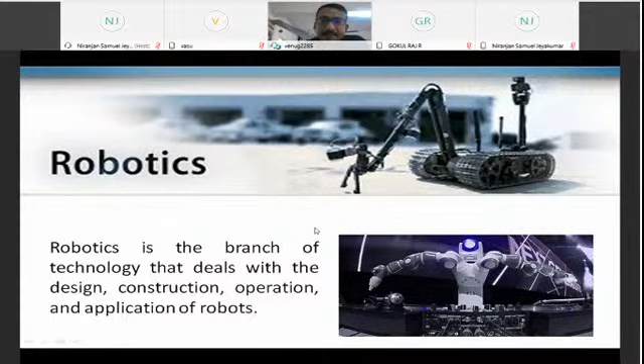Robotics combines 4 streams: electronics, computer science, mathematics, and mechanics. If you are skilled in any one engineering stream, you should know the other streams too. Then only it makes a good team. Now let's talk about the robot itself.

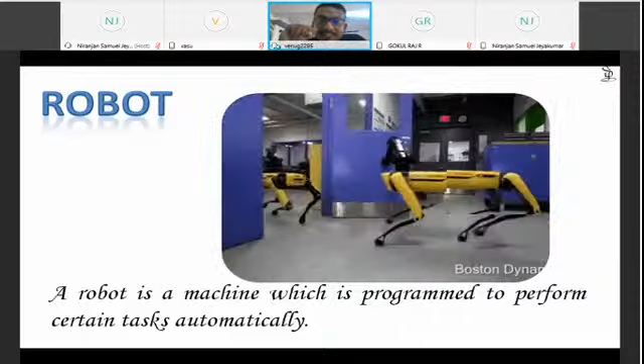A robot is a machine which performs a certain task automatically to achieve a system. There are 15 types of robots. This segregation is based on application, like industrial, defense, medical, humanoid, underwater, exoskeleton, aerospace, drones, consumer, disaster, research, education, entertainment, telepresence, and self-driving mechanisms.

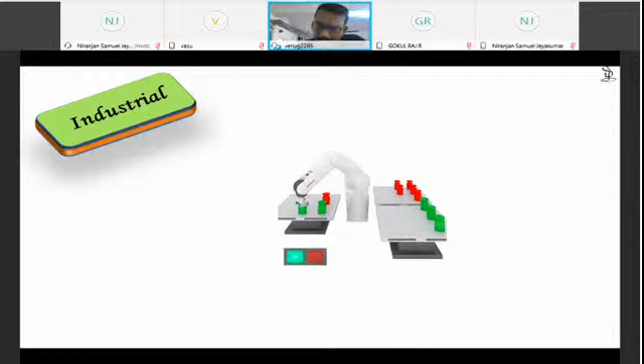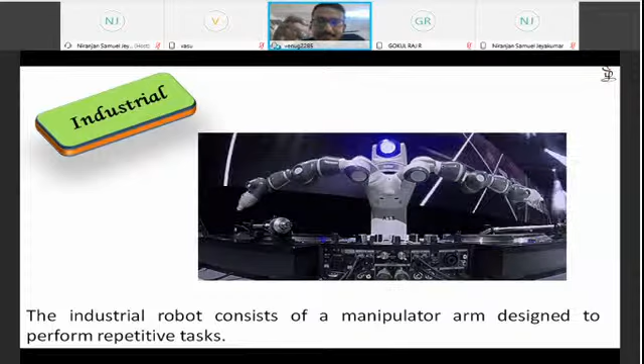Let's see the individual types. The first is industrial robots, specifically arm-based robots used in many car industries, designed to perform repetitive tasks. They are programmed by giving a learning mechanism. We have to teach the robot how to do a job, then it learns from us and does the task repetitively.

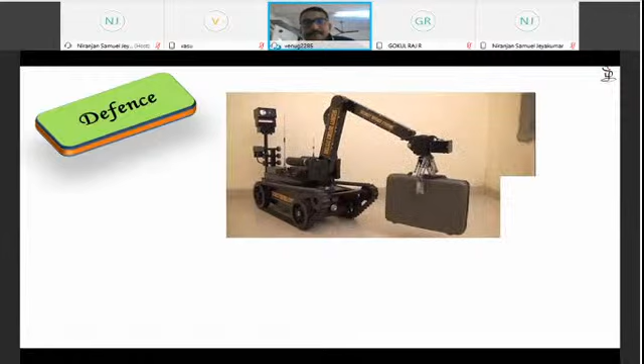Then for defense, it's used for improvised explosive devices, and may be used to assist troops in carrying heavy gears in the defense system.

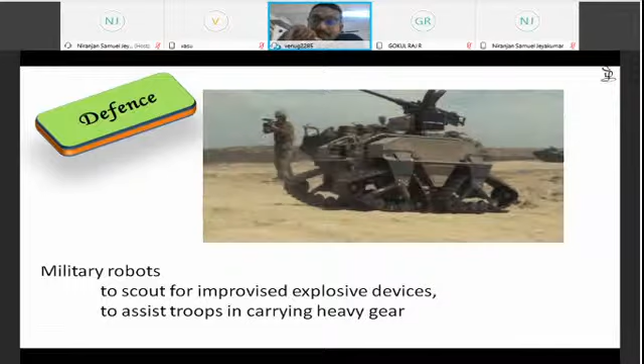The third is medical, and this is very vital in terms of robotics. For example, the Da Vinci surgical robot can be operated from a remote location, either in China or in the US. You can directly operate that robot from a remote location.

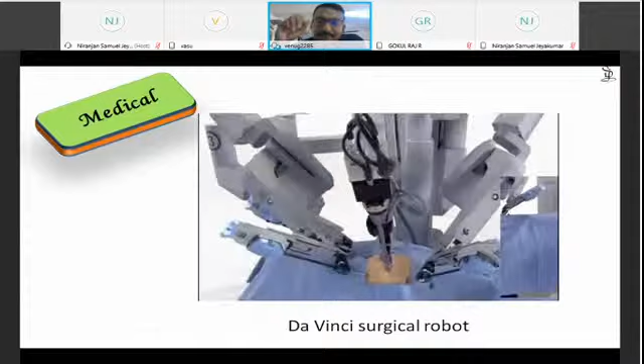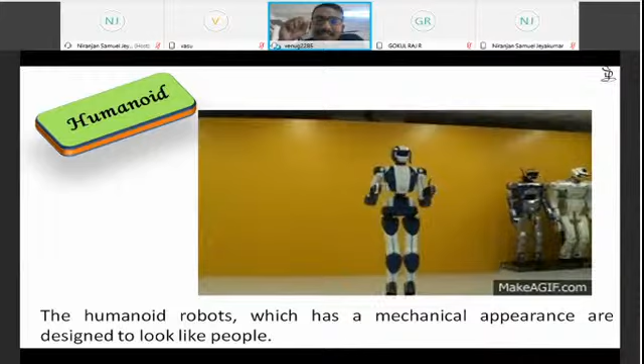And humanoid robots. As you think of a robot, you think it is like a human robot, right? So the humanoid robot has a mechanical appearance designed to look like a person. It should have artificial intelligence, machine learning, deep learning, and everything.

Then underwater robotics. Nowadays these robots play a vital role in searching objects underwater. They have LiDAR technology or ultrasonic sensors for geographical mapping underwater, and may be with or without an operator — either an autonomous vehicle or one operated by a user.

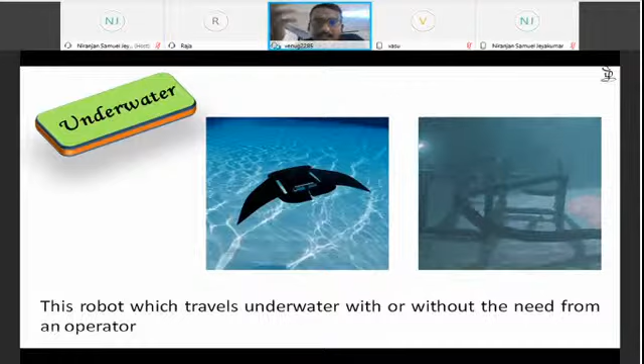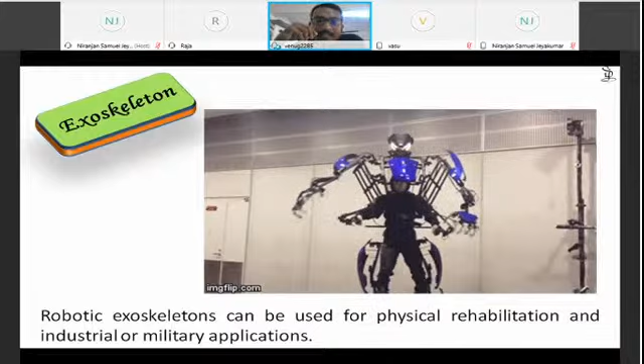Then exoskeletons. These robots are used for physical rehabilitation for a person to walk, and are also used in military and industrial purposes to lift heavy loads.

Then in aerospace, all sorts of flying robots, for example gliders, UAVs, or military vehicles and weapons mechanisms.

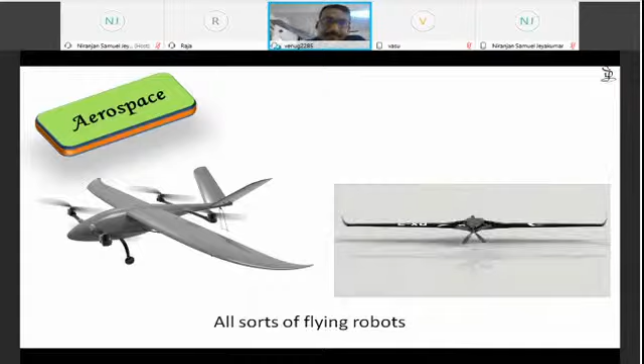Then here comes the drones. As we already know, drones play a vital role — in some applications they move carrier-based objects, that is cargo and courier-based applications. Nowadays drones are also used in agriculture. They come in different sizes based on anatomy: quadcopter, tricopter, octocopter, hexacopter. Based on the application and payload mechanism, they increase the number of propellers on the wing.

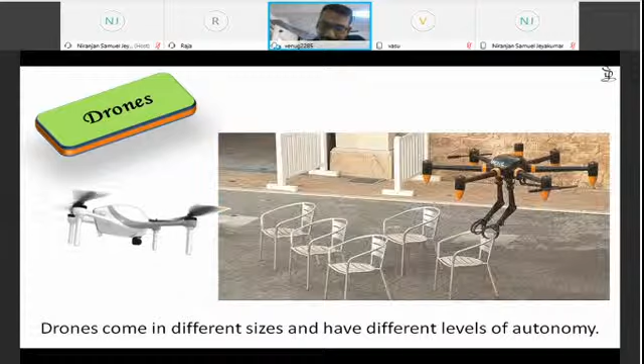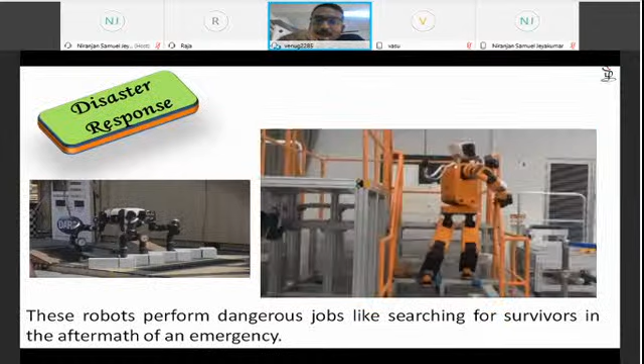Then for disaster response, these robots perform dangerous jobs like searching for survivors in the aftermath of an emergency.

And for entertainment, these robots, like a robotic dog, are designed to evoke an emotional response. It can be made as a fun-based entertainment robot, maybe PLC-based, from companies like Mitsubishi or Fanuc. These companies are leading in manufacturing industrial robots for the car manufacturing industry, but they are also interested in table tennis, ping pong ball-based robots.

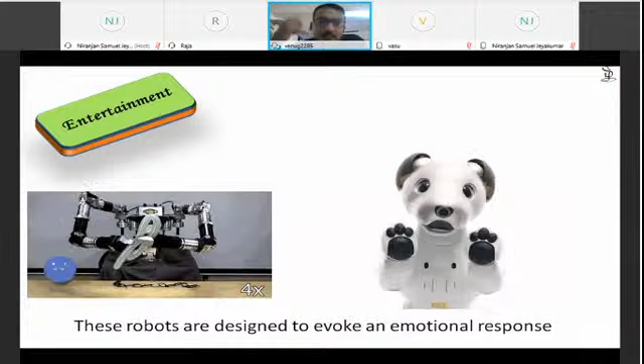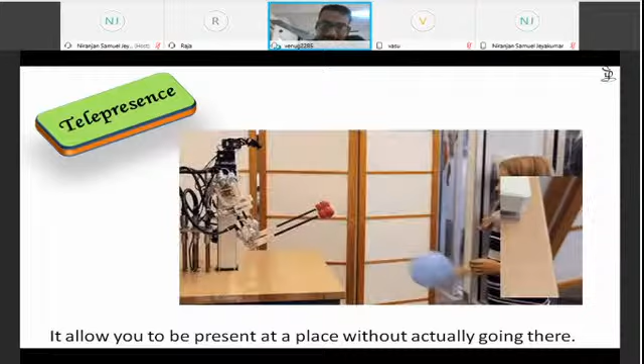Now, how to get started in robotics. There are 3 levels. Level 1 is getting started with micros — meaning you can use an Arduino controller, an MSP430, or any small controller device that can perform a task for a simplified application.

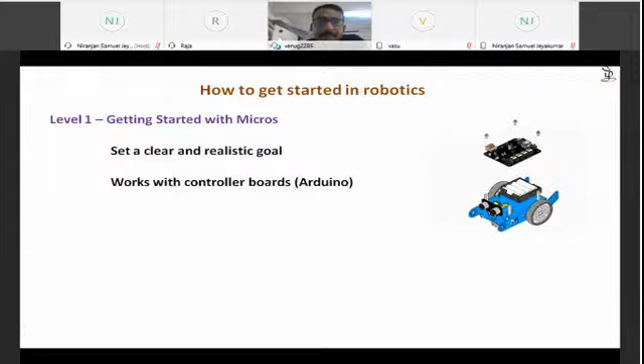In the starting stage, you must learn how to program an Arduino and how to use it. In the later section, Professor Ganesh Kumar sir will tell about how to use the Arduino on an online platform, and build the robot using basic hand and power tools.

This is the basic rule: if you are a well-wisher, you must do your robot with your own hand. It will teach you a lot.

And then you must join a robotic club. If you are in a team, it teaches a lot. If you are a single person doing a project alone, it produces much disturbance and the time is very long to complete a task. If you are in a team, it will teach a lot, and you can get more information in a shorter time.

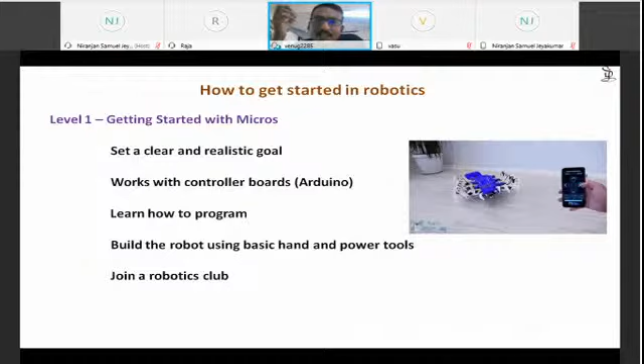In level 2, with embedded computing, in the previous level you may use an Arduino board or MSP430 or CC Link or something which is miniature. Here comes the advanced level, where maybe you can use a microprocessor-based computing system.

You can set a clear and realistic goal. So in order to design anything, you must fix what type of robot, what type of wheel mechanism, or what type of propellers, what type of design - you must realize this. Then it should be a good thing to make a product.

In level 2, you may use an advanced control board like Raspberry Pi, and you must know how to program with Raspberry Pi, like Python, Linux, or connecting sensors and motors to the microprocessor or computer on a chip.

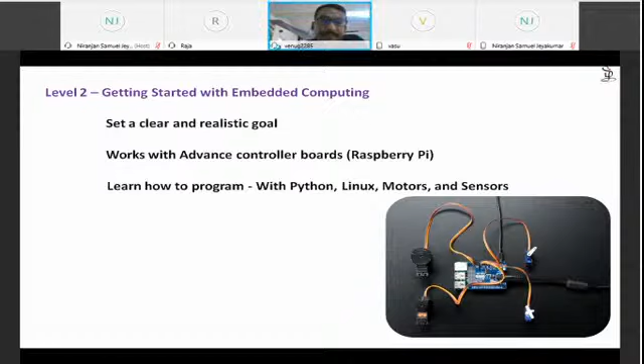And then design your parts with the CAD tool - this will be very important. You must stick to this: if you are an electronic engineer, don't think you won't need any mechanical knowledge. If you select this field, the robotic field, you must learn all the fields. Then only you can make your product a proper one. So design your parts with the CAD tool.

And then new materials and construction techniques like 3D printing, laser printing - you must use this type of construction. You can build your own design models, and then make your robot act as desired.

What do you think in the first level? You must stick to the plan, you must design it as it is desired.

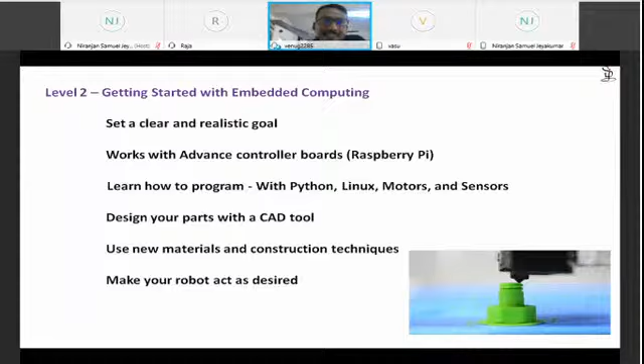And in the third level, it's advanced computing. So here also you have to set clear and realistic goals, what to do and how to do the projects. The very basic is maths. Why do we need maths? You must understand the design considerations and project-based learning.

So you must go through statistics and trigonometry - they are very basic for doing robotic applications. If you have to try any new model or new design, you must go through the basics. So you need a basics of maths, physics, and also if you use some chemical mechanism, you need a chemistry background.

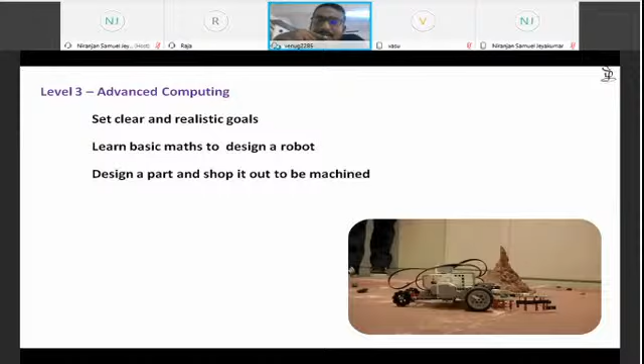And in this advanced computing, you don't need to design everything, but you may source parts as they are machined, because if you have to design each and every part, it will be a waste of time. So for advanced computing, you may use bought products, like a LiDAR camera or a thermal imaging camera - you have to buy that type of sensors.

Here comes how to learn and use more advanced sensors like a LiDAR sensor - like in the Agni 6 missile of India, they use ring laser gyroscopes. Like this, we have to search for advanced sensors.

And then the important thing is ROS - you have to learn the robotic operating system, ROS.

In the previous year, the Kinetic robotic operating system, Kinetic Turtlebot 2, was used. From this year to 2023, the Melodic version of ROS 1 will play a vital role.

If you are a good roboticist, you must learn ROS. After Python and everything, you must learn ROS. In order to learn ROS, you must learn Ubuntu. You have to install Ubuntu, then only it will help you a lot. At last, the algorithms—it's a key factor, and tomorrow's world is based upon this algorithm and learning.

The algorithm, which is artificial intelligence, may be a neural network or a genetic algorithm. In the learnings, you have to teach your robot, and the robot can learn from you. So learning includes normal programming, and then machine learning, deep learning—everything comes under this. The later part will be described by our professor.

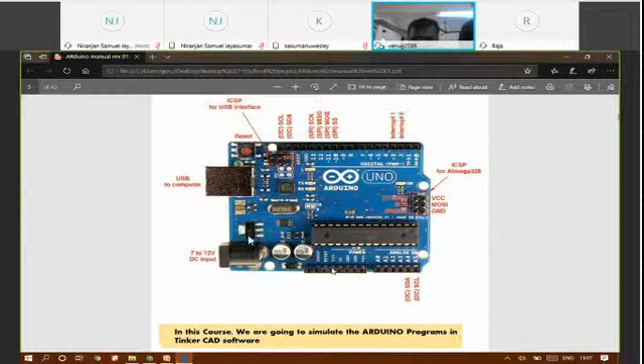So now, can you see one Arduino board here on your screen? Yes sir. Okay sir, thank you.

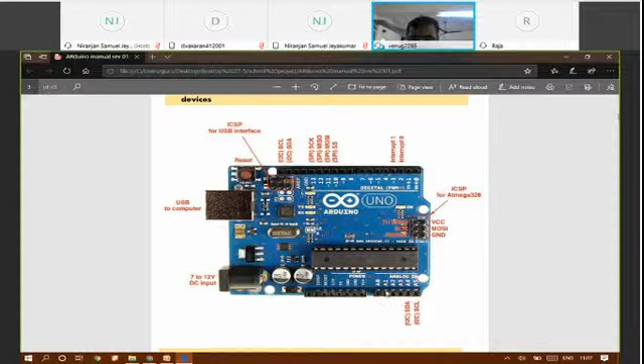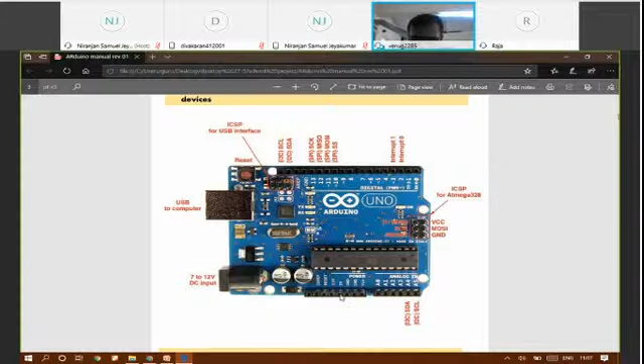So this is the board, and here you're having 6 input pins—A0, A1, A2, A3, A4, and A5. These pins are called analog input pins. And here you're having output pins—0, 1, 2, 3, 4, 5, 6, 7, 8, 9, up to 13 pins. These are used to take outputs from this board. Then here we have GND, which means ground, and here we have 5 volt and 3.3 volt provisions to take power from this Arduino.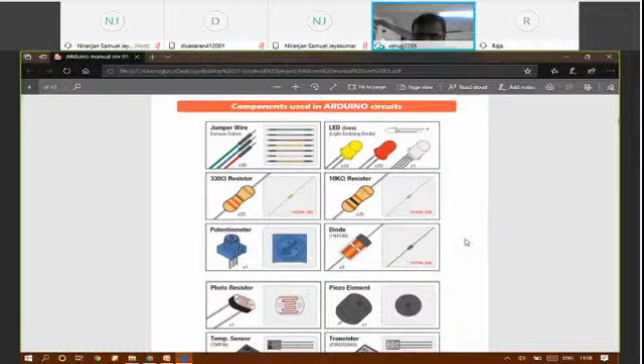So now we are going to see how to program Arduino using the software Tinkercad. This is the basics of electronic components: LED, photoresistor, stepper motor, servo motor, breadboard, and 7-segment display—these are all the basics. This software is used to load the program into the Arduino; it's taken from the Arduino website, offered by the company Arduino itself. I will give you the link to this software.

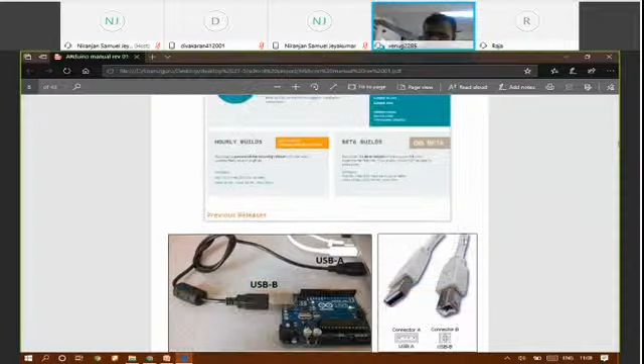Now this is a pin connection. We are going to give a pin connection to connect with the computer in order to give the program to the Arduino.

This is a cable we are going to use. It's USB type B on one end and type A on the other. This is the first exercise we are going to use. It is a platform we are using to program Arduino.

If you are using the Arduino to program in real time, then we will use this software. Now we are going to see simulation directly. So it's the basics of robot, as our Professor Venugopal sir already told. Now we are going to start from here.

This is step 1, the screenshot of the platform Tinkercad. The first step is to go to the website Tinkercad. Next, you have to log in. First, sign in with your Gmail account, or with your Facebook account.

Step 3: we have the platform like this. Now I will show you the platform clearly. Here you can do the circuit connections, simulate the Arduino, and send the program to the Arduino board using this software. You can simulate and check your programs.

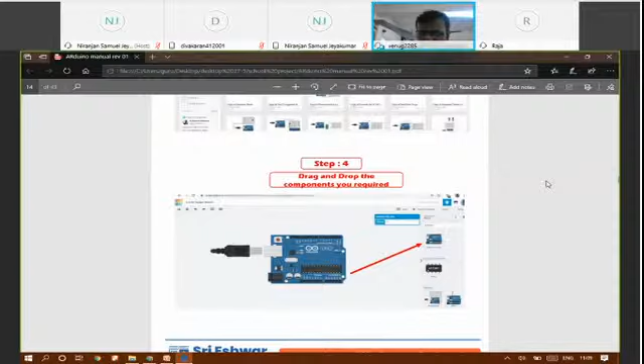This is step 4. You can simply pick and drag. Here you can drag the Arduino and keep it, and fix your components on this platform.

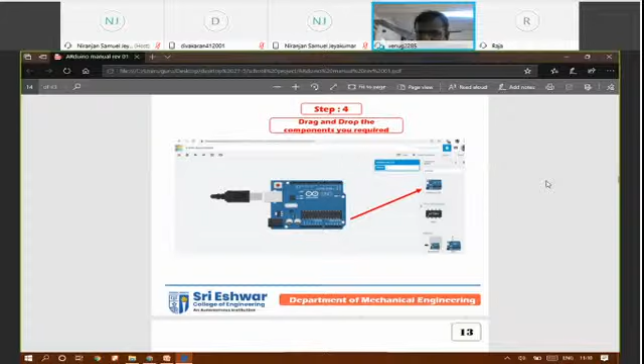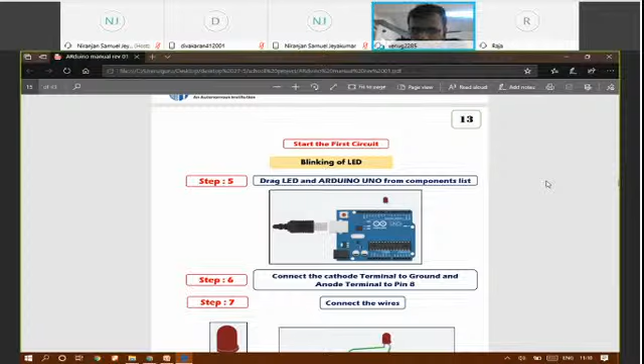The next step is you can pick other components like LED, photoresistor, thermal resistor, etc. In this exercise, I am going to drag one LED, then fix it here as shown in the figure. Next, you can connect the cathode terminal to the ground and the anode terminal to pin 8, as I'm showing here.

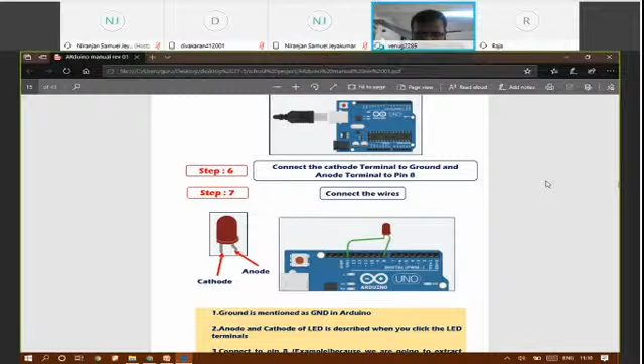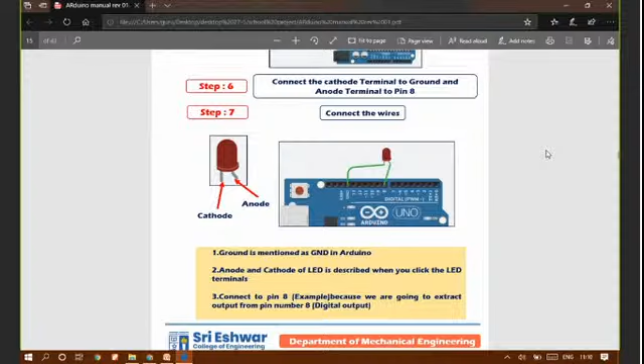I will show you the demo later; first we will see here. Next, once you make these connections, you have to program the Arduino to make it blink. This exercise is going to show how to program the Arduino to blink this LED.

So it is our program. Now we are going to give programs to this Arduino using this toggle code editor. It is called the toggle code editor. In this toggle code editor, you can edit or give programs in the form of code blocks, so it is also called the code block editor.

Now you can drag, as we did already, to drag the LED and the Arduino onto the platform. Similarly, you can drag these code blocks, fix them here, and program here. Then next you can simulate. These are the steps we are going to use in Tinkercad. This is the first exercise.

Now I am going to show you one demo. It is simple, very simple. This is the Tinkercad website. I told you, go to Google and go to Tinkercad. Tinkercad is the website we are going to see here. This is the Tinkercad website.

This is Tinkercad, the website we are going to use for simulation. www.tinkercad.com — please note down the website. This is very helpful to learn Arduino, and you can simulate Arduino programs and build your own robots, or place other robots. You can do your own.

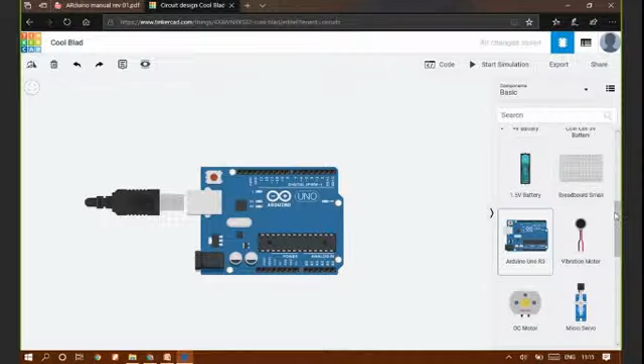As I told, we have to drag one LED. For this basic simulation, I'm going to drag one LED. Now I'm going to give connections for this LED.

See, this is a cathode. This cathode should be connected to the ground, so I gave connection to this cathode.

Now we can give this anode to any of these pins. These pins are called output pins. As I told already, pins 0 through 13 - you can get output. This is called output pins.

You are going to give the connection to any pin. So, for example, I am giving it to pin number 9, then it is given here.

Then you have to change color. There is a signal for this LED. Ground is given as black color - it's the default color, as you know.

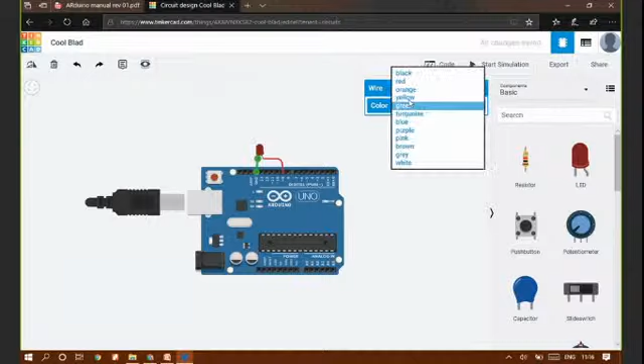Next, you are going to program. Now we've attached a circuit - see this LED and all other things. We have to program it now. Go to the toggle editor.

Go to the toggle editor. We already have some commands and code blocks. So now you are going to delete these codes.

Delete these codes, and you have to set pins. So now I am going to make this LED blink - that is my aim. I'm going to give the set pin 9 high and other things.

Now you're going to set pin - take this code block, which is also used for other purposes. This code block is used to rotate a servo or control speakers and other things. We are going to use this code block to make this LED blink.

Now we are going to control this. Controlling - so now take wait and...

Samuel sir, am I audible? Sir, am I audible, sir? Hello? Hello? Sir, am I audible? A bit, sir. Oh, okay, yeah, okay, okay.

Okay, thank you. Now we are going to use this output, the same set pin to high, low. This is a command block, a code block I'm going to use. Then I'm going to attach this code block to this area.

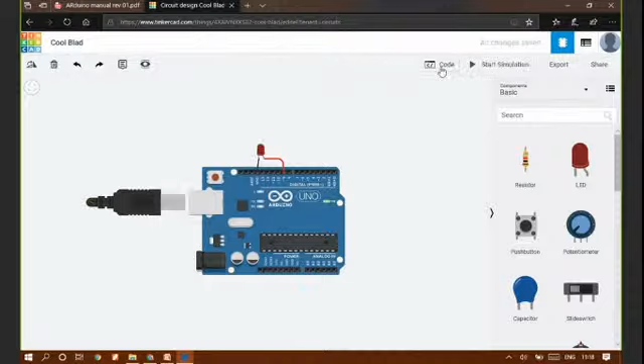Please wait - now high and low set pin, wait for 1 second. Yes, it is starting. It's going to wait for 1 second and go on and off. Since the system is slow, there is some delay, but it is working.

Now the circuit is going to make this LED blink for 1 second, wait for 1 second, on and off for 1 second with this sequence. So this is the purpose of this online software platform to simulate the Arduino.

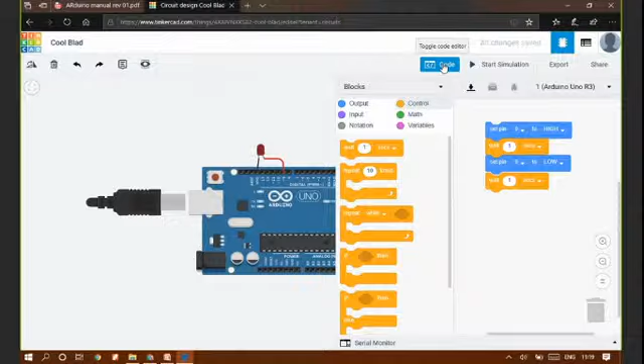You may use a servo motor, stepper motor, photoresistor, speaker, DC motor, or whatever it may be - you may use and simulate it with this platform. I hope you understood. Is there any doubt, and was this session useful?

Is there any doubt, or is the software useful to simulate? Hello, excuse me, sir. Okay, no problem, there is no answer.

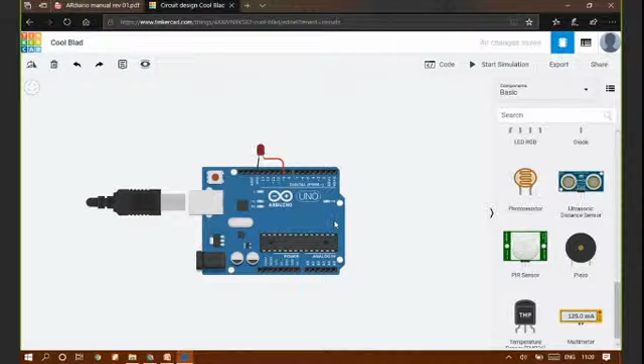Now we have components like photoresistor, ultrasonic sensors, distance sensor, etc. Simply, it is like a game. You may give this Arduino and other components, and now I am going to delete this. Simply use the delete command on your keyboard, then you can delete this. It's like video games, like PUBG and all - you can play like this, and then learn in a funny way. That is the purpose of this Tinkercad platform.

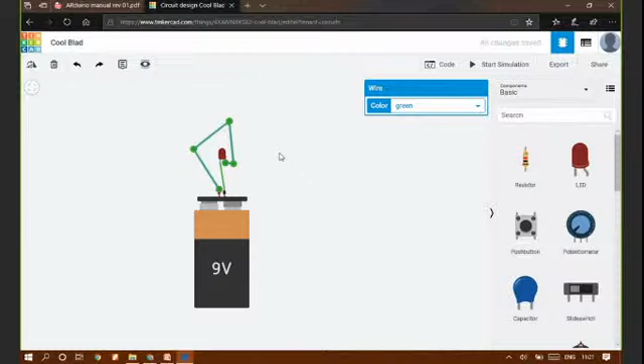And next, we can rotate these components also. This is simply a 9-volt battery. In real time, you have to give a resistor, but for simulation purposes, I'm not giving one here. Now, I told you this cathode should be connected to the ground - okay, now that is given to the ground. And again, you're going to give this positive to the anode. Here, I don't have any Arduino or other things - simply, I'm using an LED and a battery. Now, I'm going to start the simulation. It is working, so it's a basic simulation.

You can do your own in a funny way, and you can learn this robotics in a funny way.

Now I'm going to do some other cases, like I gave in our DIY manual. This is a servo motor. I'm going to use it, it's also a simple way. Now I'm going to use this servo motor, then I'm going to use a battery. This servo motor plays a vital role in pick and place robots. If you're going to design a pick and place robot, the servo motor plays a vital role - you're going to use 2 or 3 motors to make the robot move.

Okay, now I'm going to use a robotic - this platform's Arduino controller. Pick and drag this Arduino, drag this Arduino here. Now that is here. Yes, we will see the pin configuration of this servo. This is a servo motor - servo motor has 3 pins. We have signal, power, and ground. In this ground, you can attach a ground.

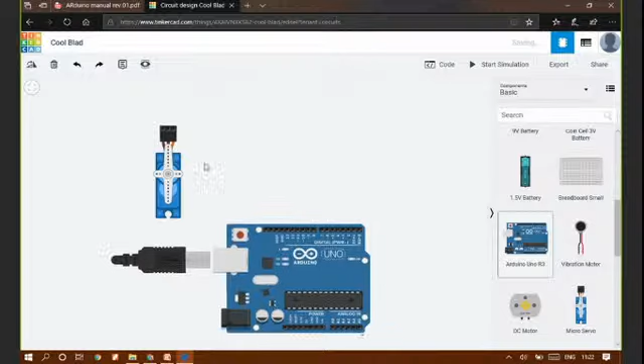See here, you can rotate these components in clockwise or anti-clockwise direction, like this. Then you can drag this. Okay, now you can give the pins - this is the signal, this is the ground, and this is power. You have to give power from this Arduino itself. We have a 5-volt power supply given to this Arduino here.

I am going to give this 5-volt power supply to these power pins. Now it is given. Now the second step is you have to give the ground. Ground is here, you can give it here, or you may attach with these grounds, because these grounds are all common.

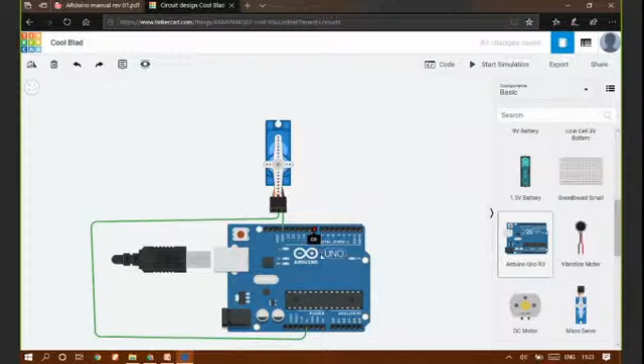Now we are going to give the signal. Signal is an input - we are going to give the input. That input is taken from these pins, because the signal is fed from the Arduino. We are going to send the signal from the Arduino, so it means it is an output - an output from the Arduino. I'm going to give pin number 8, say for example - taking pin number 8, or else you may take any other pin. Here I'm going to take pin number 8. Pin number 8 is given.

Now you can drag this - it's called wiring. Use proper wiring to avoid confusion. Here you're having only 3 wires, so there is no confusion, but if you use more wires, it will cause some confusion. So please use color codings - the signal is always given in orange color. Now you can change the color also.

Now I'm going to take the pins, the pin numbers and other things. I'm going to use this servo block since we have a separate block for servo. I'm going to use this control block - it is a wait, then you can repeat the same operation. Then simply drag, there's a pick and place option, then use the rotate servo option, then attach.

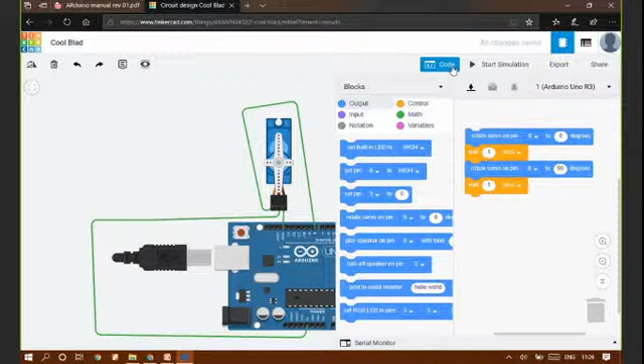This is called code block type editor. Now I'm going to start simulation. Switch off this toggle editor, then you can use the simulation tool. Now it is running.

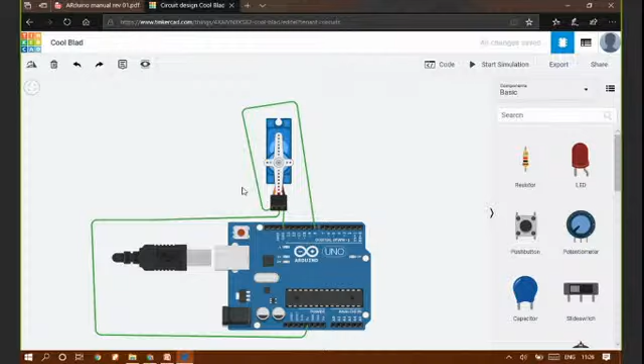So these are steps used to simulate. Now you can change the angle also. You may use speakers, you may use motors, whatever it may be, then simulate the step. So in the final session...

I'm having a file, it's not here - a PDF. I will show you the PDF, then I will share my PDF to your email. Then you have to do the program for 10 exercises. It's easy to understand, okay.

Now I'm going to move to another topic which I want to tell you. As our sir told, this Arduino is one of the tools to simulate or actuate motors like servo motors and to actuate the LEDs and other things. This is a part of a robot.

Now we are going to see some other components of the robot. It is called 3D printed parts and other parts we are going to see. For this you have to do the 3D printing, or else you have to design and model this. For this you can use one website - it is GrabCAD, a very interesting website. Go to GrabCAD. In our previous case we saw the website Tinkercad.

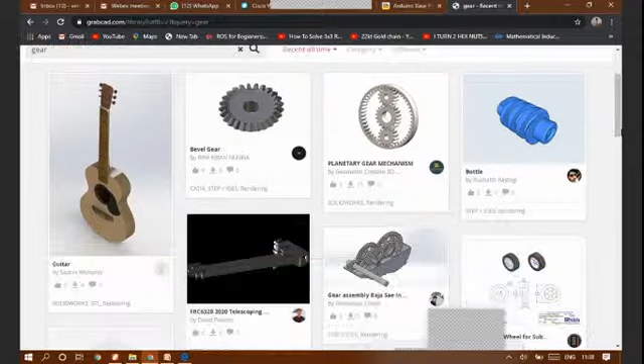You can download it, no need to draw. If you are not able to draw in CAD software, simply leave it, it is not important. Our aim is to learn robotics, to build robots. Don't learn this type of software if you're feeling it's hard. If you're interested, then you may learn it.

Now you can download the file in the form of a part, and you may give it for 3D printing. Then you can attach this, join it with the stepper motor and other things. So this is the purpose.

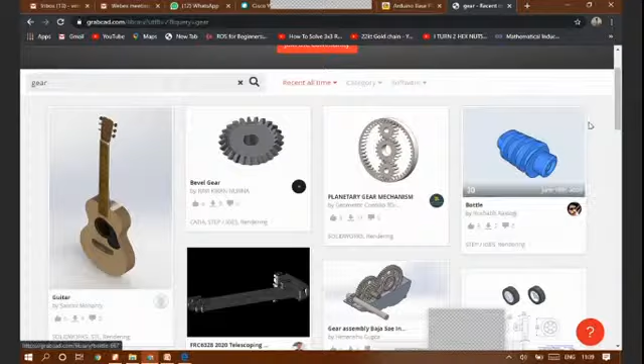Now I will give you the file, it is a PDF file. In this session, I'm going to give you a PDF file, please wait. Yeah, it is that webinar. Yes, we have a PDF file here.

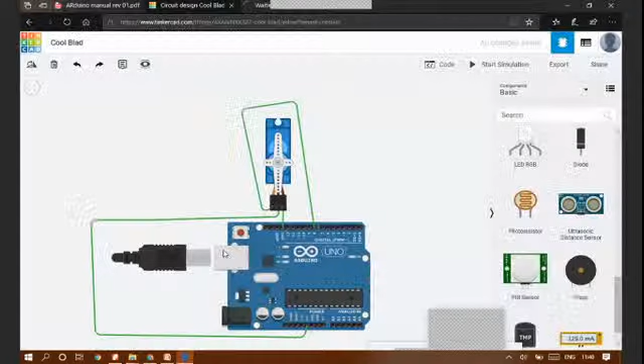3D models and other Arduino simulator DIY material. As I told you, it is a DIY manual, specially made for you to learn from basics, to simulate the Arduino from basics. Here I'm having 10 exercises. You have to complete these 10 exercises. If you can complete these 10 exercises, then you may be able to do any simulations.

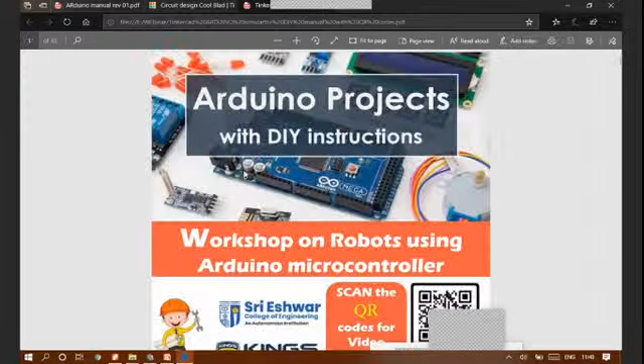I will give this DIY manual to your professors, I will share my file with your professors. Say for example, if you're having this second exercise, we will see.

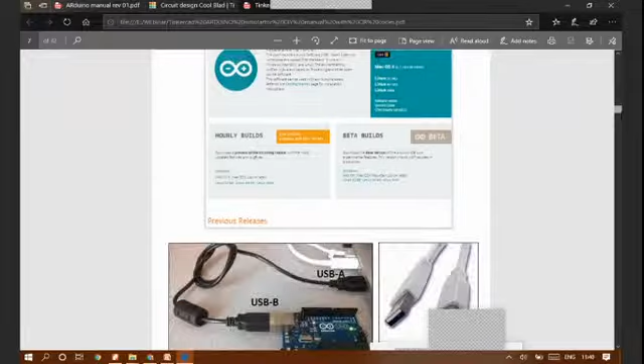This is specially made for professors and students. Here you have a platform, Tinkercad. I have this QR code. For all these 10 exercises, I have clear videos on my YouTube channel. If you scan this QR code, it will automatically take you to that video page.

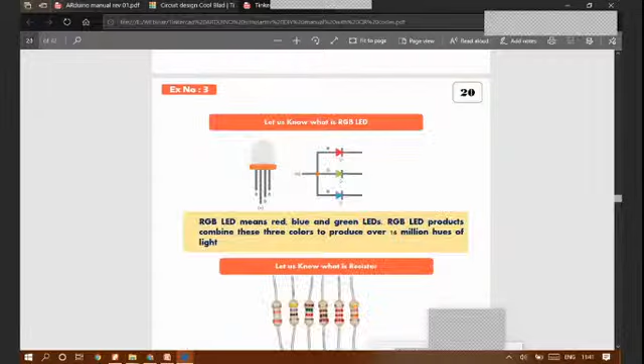The next thing is there's a color coding. I gave a clear explanation about these exercises, and I simulated all of this and so on. It is recorded and uploaded to my channel, you can download it.

Now I am going to give one important thing: how to download a Tinkercad file. If you are a beginner, then you can download it.

No problem, here you're having the circuits. See, it is a Tinkercad file. If you search, for example, say I'm not going to give a circuit - I am a beginner, I don't know how to perform the codings and connections. Simply search on the internet, everything is available, including the coding for Arduino and robots also.

I am going to search for ultrasonic sensor. First know how to search in Google, it is very important. It is a simple trick, but you have to know. Search: ultrasonic sensor, Tinkercad file. It is a Tinkercad file.

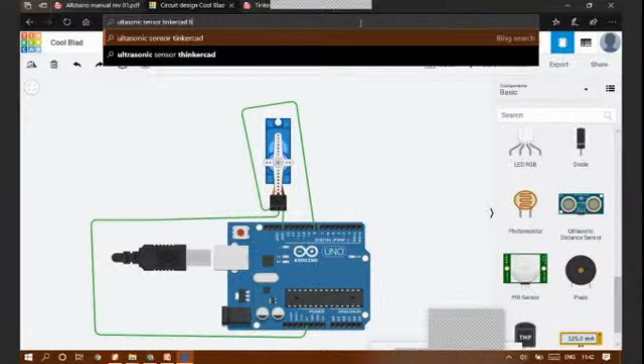Go to the Tinkercad file. Here I gave the servo motor and other things manually. They have a 3D design also, see here. If you download, you can get the stereolithography format file. Here I am going to give the circuit design, the ultrasonic sensor file. Don't bother about the programs, it is already available, including the circuits.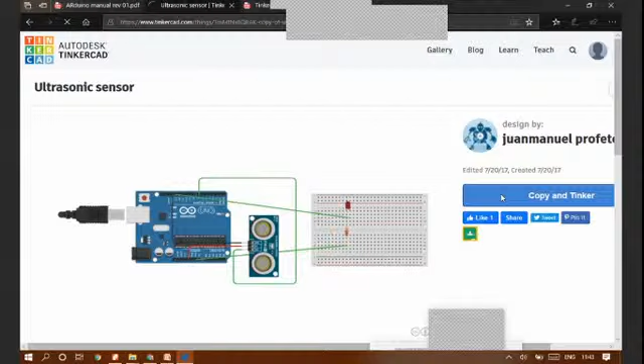It is very simple. If you know how to download and edit the programs, then surely you will be good at Arduino. Now here I have my ID. See, I'm not going to do anything with this ultrasonic sensor - I didn't give any connections, I didn't give any programs, but it's available. Give copy and tinker, so now this file is mine. You can edit it yourself, then simulate. If you don't know, if you are a beginner, then it is very useful.

First know how to search in Google. Don't go to other sites, go to tinkercad.com files. Like this, then next, please wait.

It is working, please wait. Then you can download these files, then simulate, then copy the code to your project also. It is one important thing I'm going to do. Then there's loading - loadings and other things are loading here. Tinkercad is not responding.

Now please take note - you can download the code and the circuits also in this way. We'll wait, we have codes of ultrasonic sensors. Don't bother about codes. So now I didn't give any circuit connection, I didn't give any codes, anything. Here, this file is downloaded already.

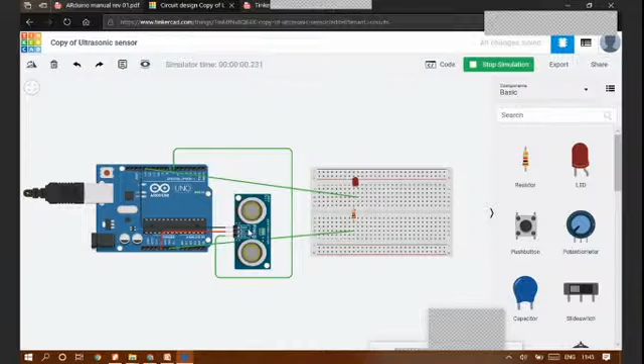Yeah, it's here, and now the system - see here, you can adjust the distance of this ultrasonic sensor. First of all, you have to know the basics of ultrasonic sensor. If I'm telling it directly, that will be boring to you, so that's why I'm giving these instructions. It's like games, like PUBG.

If you are going to cross this limit, then this LED is going to turn off. If you cross this region, then this LED will blink. So that is the purpose of this coding. Here they gave the coding like this - the steps and the algorithm they gave here.

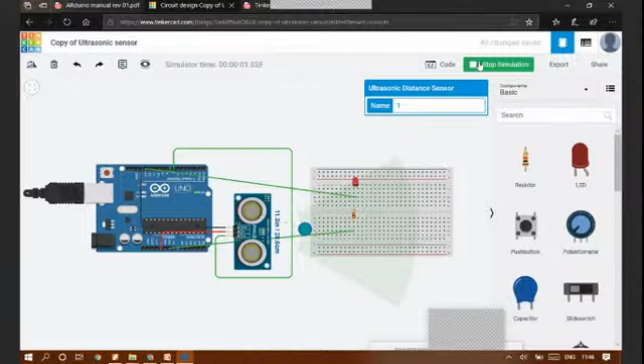Simply you can download for all components. Search when you are free, search all these components and circuits and edit it. Search when you are free, search in Tinkercad, GrabCAD, and the website Instructables. I hope you understood.

So let us conclude. Is there any doubt? Is there any doubt? If the session is useful to you...

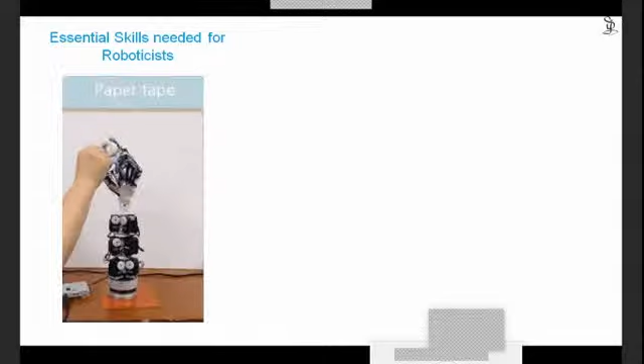A roboticist needs essential skills — these are the 10 essential skills. The first is system thinking. You have to frame the work — what are the processes you need to give to the robotics — you have to frame this first.

If you have to take any video or something, you have to write the script, so then only you identify what we are going to do. Likewise, you have to think like a system — how it performs, how it rectifies problems, and so on.

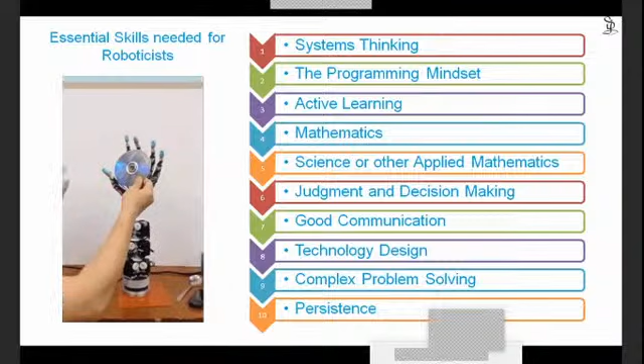And then you have to set your mind for programming — which type of programming you're going to use, whether ROS or some other platform, or some other boards you have to hire. So you have to set your mind.

And then you should be an active learner. Every year or every 2-3 years, the robotic platform may change — the ROS version went from A to M. In the past 10 years, in alphabetical order, it started with alpha, then came K for kinetic, lunar, and then the melodic section, and now they've switched over to ROS 2. So you keep on learning, then only it helps you a lot.

As I said, mathematics is basic. So you should know the basic factors — trigonometry, statistics — it's all basics.

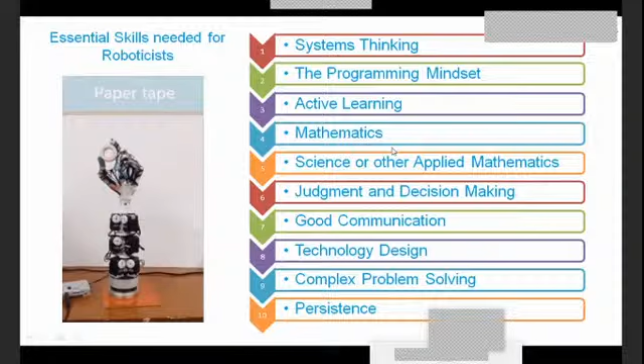Then sciences or applied mathematics—if you have to design a rover for the moon, you have to know what type of gravitational force and what type of sand, you have to think about it, you have to know the basic science.

Then decision making—if you are a robotist, you must take the decision, don't give the decision to others. Then everything, you should have good communication skills, right? And then technology design—don't stick to the old design, you have to search all these aspects.

Now the HD camera comes in, for image processing, thermal imaging camera, night vision cameras, then laser guidance missile system—the technology keeps on changing, you have to update yourself, right?

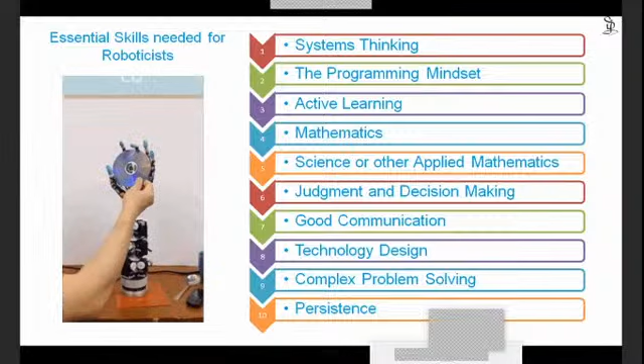And then you have to incorporate complex problem solving, right? It's very basic—if you have to design artificial intelligence based robots, you have to think about this complex problem solving. First you have to think, then only you teach the robot to think, right? Last is persistence. These are the basic skills needed for a robotist, right?

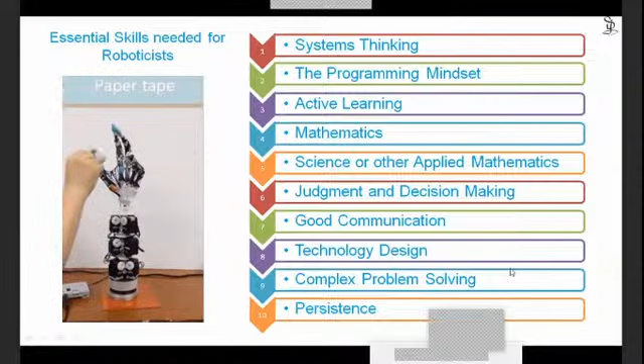As a part of this, we started an RC club in our college last year in July. From one year of teamwork, finally we designed one robot that is an unmanned aerial vehicle. This is the God's Eye model, which is selected in SIH 2020—it's going on now, we are a finalist contestant of SIH 2020.

We created a unique design of UAV for surveillance. This design is not anywhere else in the world—it's like a dragonfly design. We changed the anatomy, we segregated and incorporated the dragonfly anatomy, that is nature's anatomy, into a project.

It will help you a lot because technology is based upon nature's evolution. The aeroplane came because of butterflies or something like that, right? So technology transfer is based upon nature—we created the idea from nature. So if you have to find a solution for a problem, you have to think about the problem in a natural way. That's the thing, right?

And for hobby and entertainment, in the World Robotic Competition, we are going to participate in the fastest line following robot—not a line follower, but the fastest line following robot, for the Technoxian 2020 competition, right?

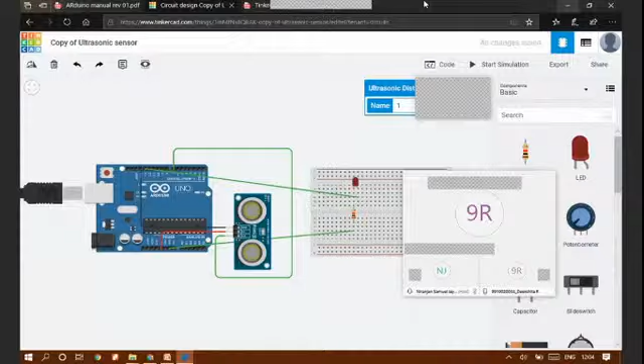Very useful, anything application of robotics in IT industry? Somebody asked regarding the IT industry, right? Nowadays, IT industry doesn't need any robotic operation, but in programming, we are utilizing this industry, right? We use the ROS software. In ROS software, most things depend upon the IT industry, right?

Any other? I think sir explains the Tinkercad, right? If you are a basic, I'll tell about the 3 stages, level 1, 2, 3. In level 1 you should be there, you have to think about the microcontrollers, that is Arduino or anything. This pandemic situation, this online software Tinkercad will help you a lot. Without using the hardware, you can program anything. By using Tinkercad, this version, it is in circuit mode. If you design a model, Tinkercad model, you can design your robot diagram, right? You can design your robot car, and then incorporate the controller, Arduino controller, in that board. You can use that one in a similar way, right? It should be helpful in this pandemic situation.